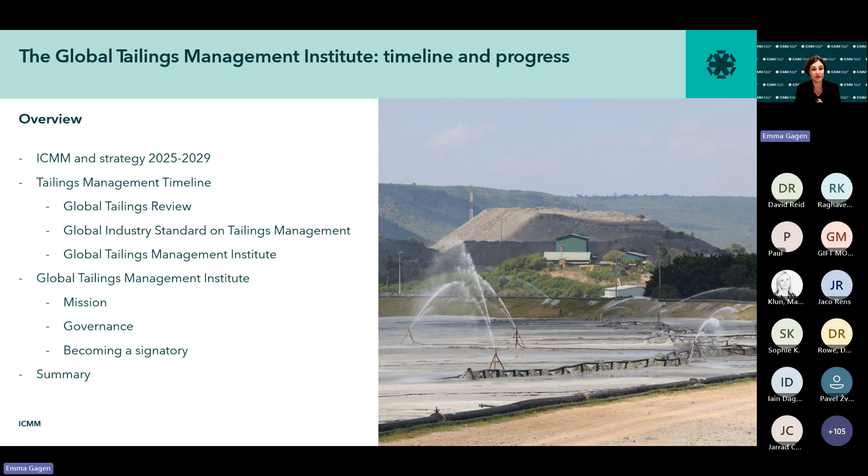So who's ICMM? We're a global sustainability leadership organisation bringing together about a third of the mining and metals sector. So our 24 mining company members are listed on the slide here. And then we also have about 45 or 50 association members, which might be commodity associations like copper, lithium, manganese.

Or they could be regional associations like the National Mining Association, Mining Institute, or MAC, for example. All of them share our vision for a safe, just and sustainable world underpinned by responsibly produced minerals and metals. Through our reach with company members, our standards are effected in more than 650 assets in more than 50 countries globally.

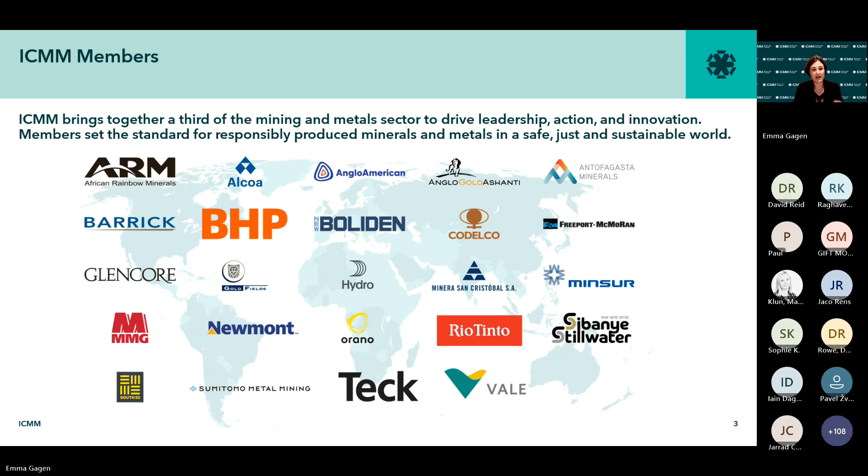Our mining principles are the foundation of ICMM membership. So it's not really possible for someone to just say, I'd like to be an ICMM member, can I pay a fee? There's a rigorous process around adhering to the mining principles we've outlined, and site level assurance and validation over a continual cycle against all of those commitments.

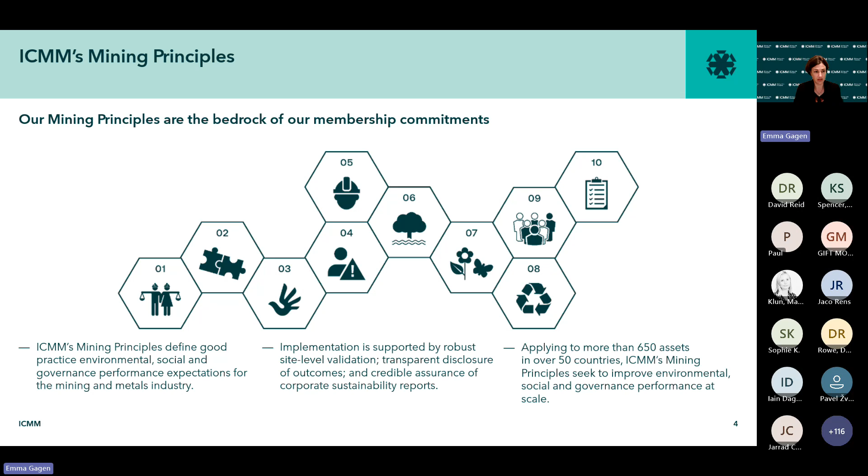There's 10 mining principles, and each of the sub-commitments under them are articulated on our website, or sometimes in more detail via position statements where there's a clear subtopic that needs a deeper dive. You can find out more about any of those on the website, everything from environmental performance through to social performance and governance. The tailings related principles are under mining principle number 6, which I'll dig into now. And it's actually our environmental performance portfolio.

It includes commitments on climate, water, pollution, etc. But our commitments around designing, constructing, monitoring and decommissioning tailings facilities in line with good governance and international good practice are the foundation. You can see we have a couple of footnotes against the commitment there.

And that includes taking a strong position that freshwater lake riverine disposal and shallow marine disposal is an absolute last resort. And the second footnote is around our commitment to implementing the global industry standard on tailings management. But otherwise it's kind of encapsulated in that very high level principle there.

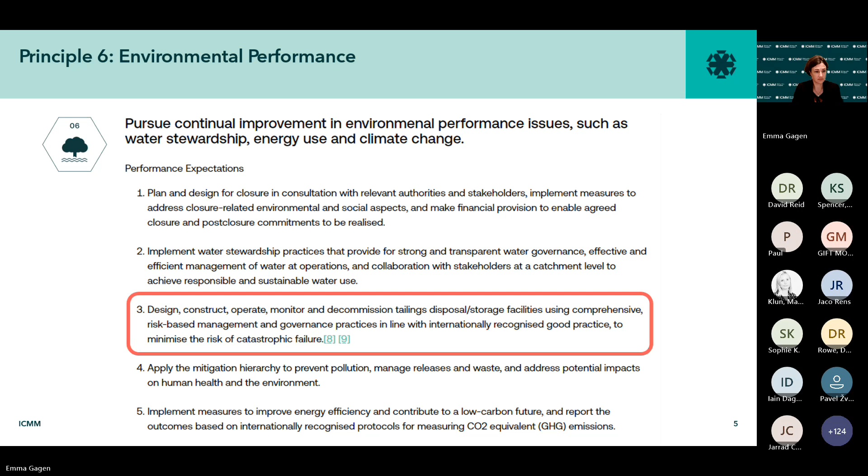Where we exist as an organisation is to support our members deliver on those commitments. This is what it looks like on a page for us for the next 5 years. This is our strategy that just started in 2025 on how we're going to support our members deliver on their commitments on safety, climate or tailings, as you can see under the performance pillar of our work.

We also have other parts of our work program that are around raising wider industry standards, so not the membership specifically, but outreach to other parts of the world or unreached areas of the sector, for example. That's primarily being achieved through the Consolidated Mining Standard Initiative. Happy to take questions offline on any of that work if it's of interest.

There is a tailings chapter, and this will become the standard that replaces our mining principles in the future. Then there's a third piece of work that is around dialogue, engagement, communication and advocacy. And you can imagine tailings gets a feature in there as part of our outreach or showcasing member performance. But this is also policy engagement and the data work that I talked about that's new in this strategy. So it's not focused on tailings in particular, but tailings may get a feature in any of these pieces.

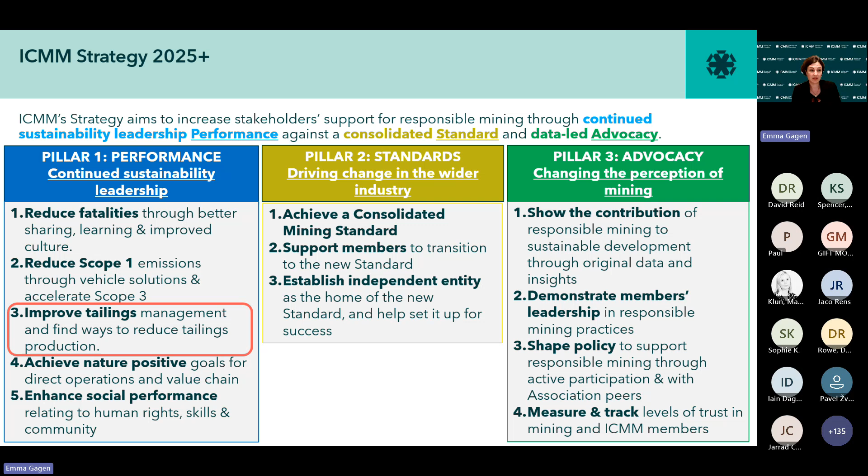So I hope that's a bit of a snapshot on where tailings fits for us as an organisation. It isn't something that we've started working on recently, however. So here's a kind of look back over the last 10 years, if you like.

In 2016, our council, which is the 24 CEOs of the major mining companies that are our members, agreed to a position statement taking a very specific commitment around tailings governance. And that includes everything from change management, the whole life cycle from pre-feasibility through to closure, and articulating really specific requirements on accountability, competency, planning, etc., emergency preparedness.

We had, in parallel, a piece of work or an idea being birthed that it wasn't only about safety, however, and a couple of years later Council also committed to a longer-term goal to do something really innovative and think about eliminating conventional tailings storage facilities completely. This is articulated in what we call our tailings aspirational goal. It's a much longer term kind of vision, if you like, a 10 to 15 year goal to innovate and think of ways to eliminate conventional tailings storage facilities.

This is, I think, a really exciting piece of work that probably hasn't gained as much attention as it might have in a different set of previous 5 years, if you can think about that.

A really important piece of work about collaboration to reduce the hurdles and the activation energy for overcoming some of the challenges around implementing new technologies at scale, or rolling things out and piloting and testing things that we can do with the membership that you probably couldn't do if you were just one company alone.

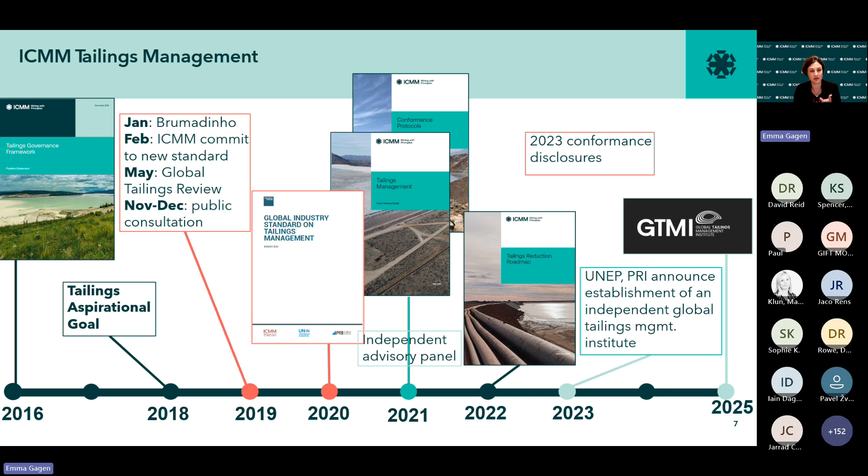In my portfolio at ICMM, under the tailings management work, this also included seeing the GTMI fully functional, if you like. While it's been co-founded and established in South Africa, there's a lot of administration and logistical detail that probably no one's aware of until they try to start establishing an independent institute.

So progress has been slow, or slower than I anticipated, and I had really hoped we would have had a public announcement this week before this presentation so I could share a bit more info with you. But I'll give you a sneak peek and say, keep your eyes peeled before Friday—I think you'll see a pretty key announcement coming out from the GTMI.

What you will have seen already is that it's an independent multi-stakeholder governed organisation. It has its own CEO, or will have its own CEO, it'll have an independent board, and it's incorporated in South Africa. It was really important to all the founding partners that the Institute, wherever it ended up, had strong tailings background and a presence in the Global South. South Africa seemed like a reasonable choice for that when we were considering where to have this long term.

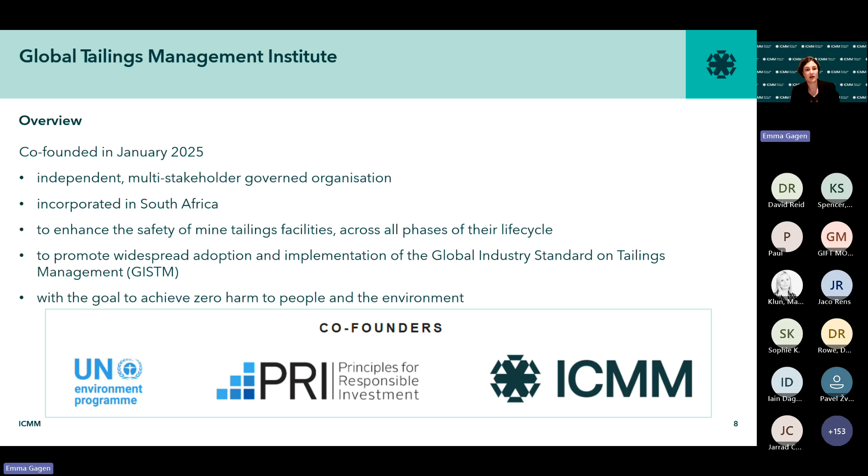Its goal is the same as the goal of the standard—the same thing we all want: to achieve zero harm to people and the environment from tailings facilities, doing that through implementation, adoption and certification against the GISTM. Their core function, delivering on that vision, is to manage the assurance framework around the GISTM.

So one doesn't exist yet. We had published our conformance protocols a couple of years earlier, but an independent assurance framework with accredited and certified auditors doesn't yet exist—it will exist with the GTMI. So that's their core function: to develop and then manage that assurance framework.

On the side, they'll also have a key role in supporting wide uptake of the GISTM outside the ICMM membership, widely across the industry, to facilitate knowledge sharing, best practices, capacity building, as well as disclosure of auditing outcomes. This was one of the key recommendations from the Global Tailings Review, that for this institute to have credibility, it needed transparency for stakeholders to see disclosure outcomes against the GISTM. That's going to be a really unique, powerful feature of the GTMI.

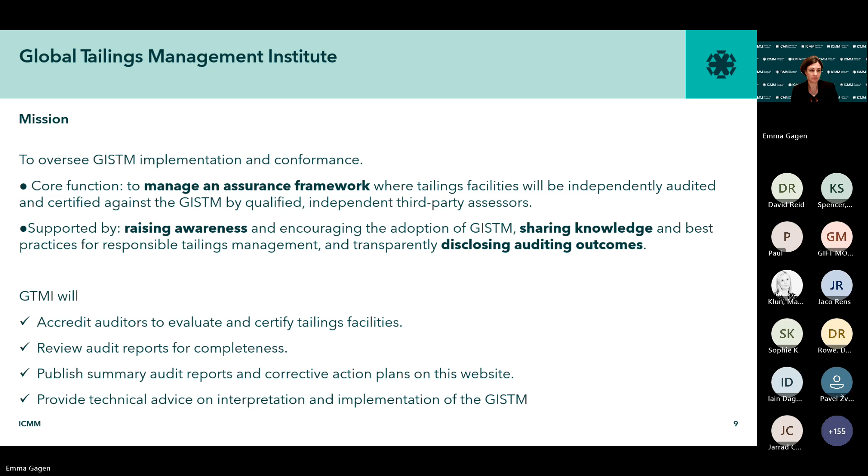It's a not-for-profit organisation. People can become a signatory by paying a fee, which should be a flat fee based on the size of the company, size being determined by number of TSFs—so less than 10 TSFs you might be a small company, more than 10 you might be a big company—flat fee based on that.

But the idea is not for it to become a money-making organisation, but for the funds to go back into the assurance accreditation scheme and the industry outreach and knowledge sharing for the facility.

The multi-stakeholder board that we've written into the Memorandum of Incorporation has 9 members, representatives from the mining industry, affected communities, Indigenous peoples, and others you can see on the screen. This is part of the reason why an initiative like this takes such a long time to get off the ground—you can imagine how difficult it is to bring different voices and perspectives from all these groups and have a constructive and productive board that's going to set the long-term future for the Institute going forward.

We've really taken our time since the call for applications from the board to interview and interview again and ensure we've got the right mix of people on the board. That process is very much in train, and I anticipate an announcement about the board later this week.

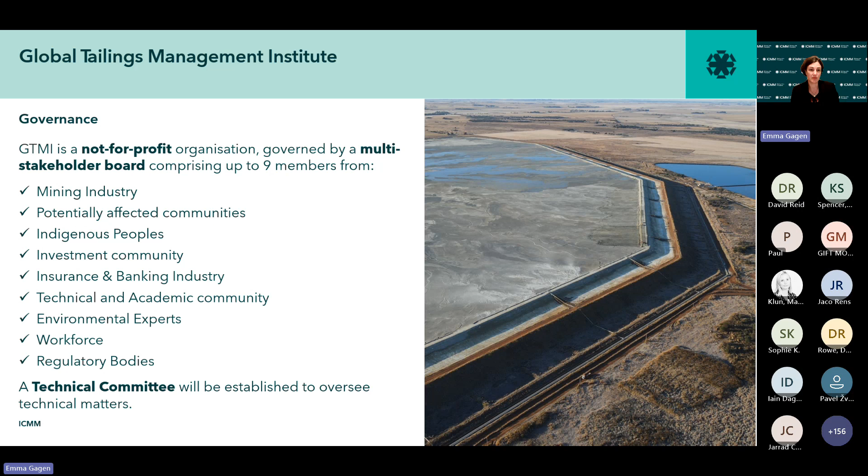Later, after the board is established and a CEO is recruited and in place, a technical committee will be established, and their role is to oversee any technical related elements that come to the GTMI. Whether it's questions about the standard or reviews of the standard, the technical committee will be individuals more tailings-focused than necessarily some of the representatives on the board, who all have an interest in tailings and are well connected, but aren't necessarily engineers. So the board and the committee will function in parallel with quite different scope.

As mentioned, you should see a board announcement soon. We're also in progress searching for the first CEO for the GTMI. He or she may choose to appoint a CTO - there's capacity for that in the governance structure. If they want to do that, there could be a CTO soon after, and the technical committee establishment will be very imminent, I believe one of the first activities after the board is established. So keep an eye out for those things.

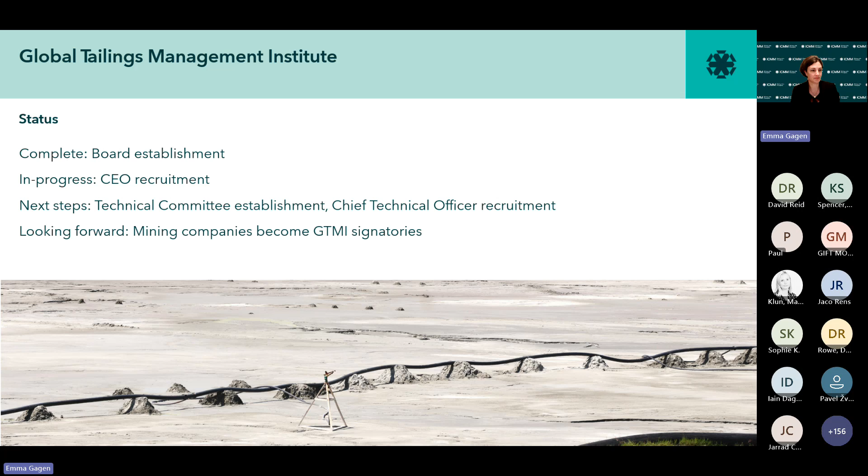Signatories are anyone who has responsibility for a tailings facility and can become a signatory of the GTMI - that's a commitment to responsible tailings management, to conformance with the GISTM, as well as knowledge sharing and capacity building more generally. If you want to become a signatory, it's a commitment to implementing the GISTM and fully disclosing transparently outcomes from the conformance against that.

It's also about stakeholder engagement, being able to communicate that you are a GTMI signatory, therefore you should be expected to be operating at a different level to others who are not. The founders anticipate this should improve relationships or give more social license to operate, improve relationships with regulators, potentially investor confidence, insurance coverage, etc. That's the business case articulation, if you like.

It's not just that GISTM is the right thing to do. There should become a distinguisher in the future where someone can say, I'm a GTMI signatory, my outcomes are transparently disclosed on the website, therefore you can trust what I'm doing and have confidence in me if you want to invest or approve a permit, or if you're a community nearby. That's the origin and the idea.

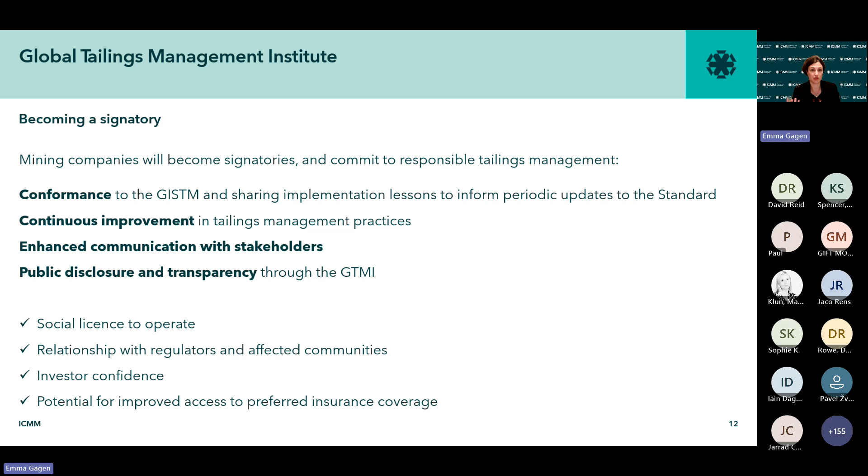If you're not responsible for or don't have operational responsibility for a tailings facility, you're still able to support the GTMI. Supporters have a role, for example, in fostering knowledge. They might want to host a roundtable or facilitate wider industry uptake, or create the connections necessary for the regulator to dialogue with the GTMI.

We don't have a limit on this, but it's just to signal that GTMI support doesn't only involve the financial commitment and contribution and the commitment to the standard - it can be from the rest of the community around tailings as well. So I'd encourage you, if you're a consultant or an interested party, to think of ways you might be able to support the GTMI and its mission through capacity building, knowledge sharing, and relationship support.

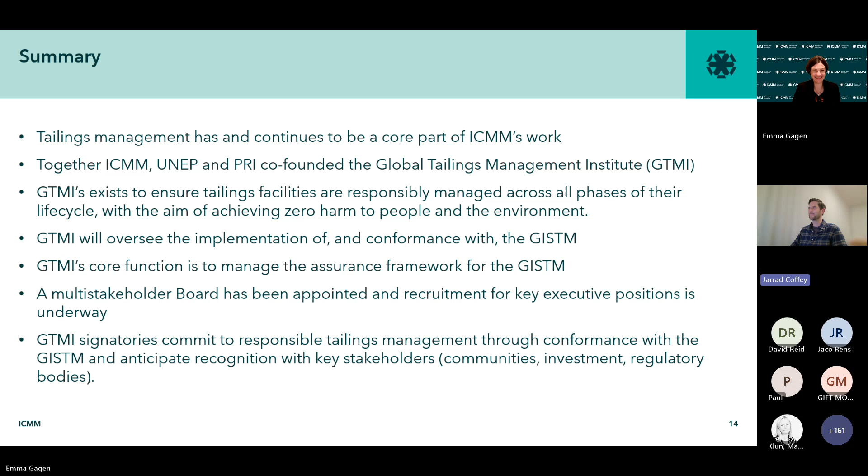Yeah, thanks Emma, really appreciate you taking the time to update us today. And we only missed it by that much, hey? Maybe next time there'll be a little bit more to share, I guess. I'll give everyone a couple of minutes maybe to think about some more questions in the chat.

Emma, one thing you didn't touch on was potential updates to the standard in future and how that would fit with the GTMI's responsibilities. Yeah, great question. And I purposely didn't, because I hoped someone might ask.

I believe the Memorandum of Incorporation will become public once the board is fully functional. It should be up on our website, so you'll be able to see any of this information to fact check me then. But the founding partners want the GTMI to be fully independent and fully functional on its own. So when the board is in place and the CEO, we're kind of extricating ourselves and taking a back step.

However, when there are ever decisions in the future from the board, or recommendations from the technical committee, whoever, to revisit or reopen or look at changes to the standard, the founding partners get called back in. So that's kind of the only time we would intervene again in this independent functioning entity in the future, and that would be if and when the standard is being reevaluated.

I would say that I don't believe a core or primary first step of the board or the technical committee is to open the standard. There's a lot they need to do around conformance, the assurance procedures, and then validation and how they're going to transparently disclose auditing outcomes. So I personally don't believe that reopening the standard is a first priority in terms of the priorities for the GTMI going forward. But we'll see once it's independently functioning what comes out.

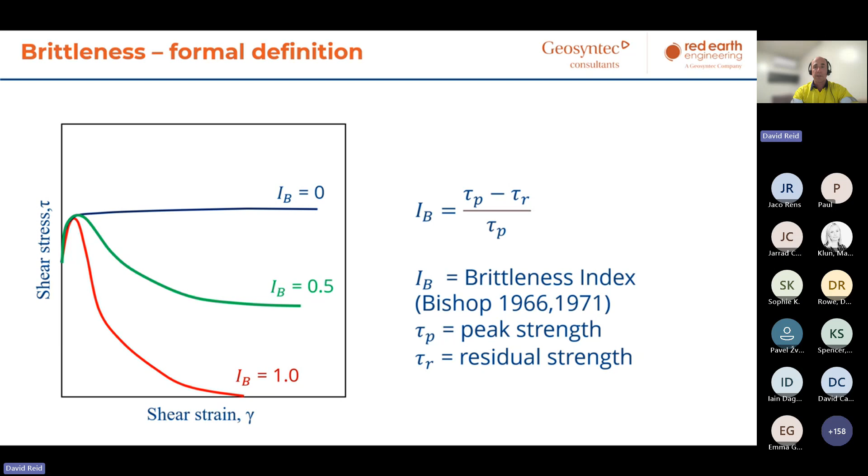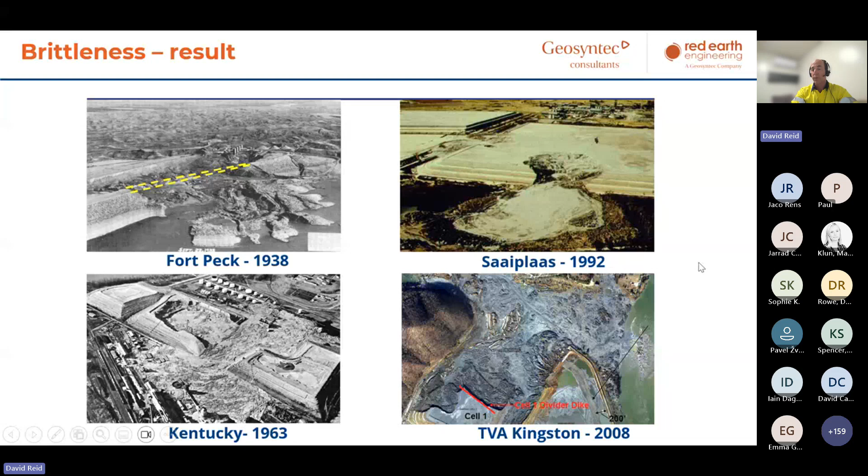Now, the problem with brittleness is that when things are brittle, they can look like this. They can fail rather suddenly in some cases, and they can go a great distance, because the more strength something loses, the further it needs to travel to reestablish an equilibrium, if it even can. So this is what we're talking about: things that go a long distance, can cause a great deal of damage, and in many cases can do this with very little warning, particularly if that drop post-peak is steep and fast. In that case, the ability to have warning for this is very little. One of the reasons why we're so worried about this type of structure, brittle soils.

Now, this brittleness index has been incorporated - probably the place you're seeing it most often now is in the most recent ICOLD bulletin, which is really good because it sets the scene around this concept. It goes through a bunch of background about it, it's a very good read. So it's really useful because it's got us talking about the right thing.

I'd kind of argue that people spend a bit too much time worrying about whether something's liquefiable or not liquefiable, running an Atterberg limit check, stuff like that. That's almost a red herring. What really matters is how much strength does it lose post-peak and how fast, because the Atterberg limits, while giving you some indication of that, are not really the key. Whether something's liquefiable or not is not the key question. The key question is how brittle is it and how fast is that going to happen?

Okay, so the ICOLD bulletin breaks this up into some different categories. That's not really the main point of today, you can read that - it explains it better than I can.

The main thing I want to talk about today is that if you want to use this framework, which of course we all should be using and will be using, you need to be very good at measuring both the peak and that final residual value. Because if you can't capture how the soil is going to behave in situ in some reasonable way, then applying this kind of framework becomes more difficult, and in some cases could be misleading and dangerous if one is estimating these things in a not-state-of-practice way and getting erroneous values.

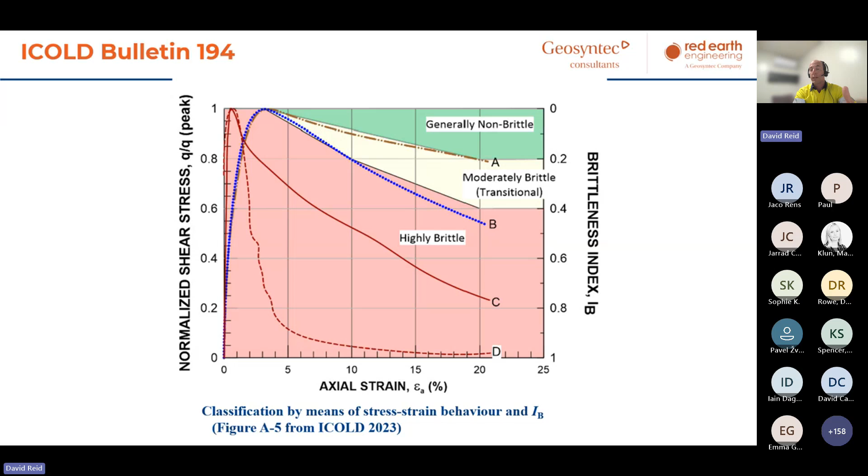So that's the point of today, is just to go over some areas where I see issues happen around how you would capture the strengths you need and the stress strain results to make this kind of a conclusion. I just want to start at the beginning. This first one's going to be lab based, because that's kind of my home turf.

I want to start really basic with moist tamping, because even though a lot of people quite rightly don't like moist tamping, it's sometimes all we have for some of the situations we find ourselves in. We want to prepare tailings, say silt, very loose. Now, to do that, we don't really have any choices in terms of preparation technique other than forms of moist tamping right now. So we end up using moist tamping probably more than we deep down really want to be using it.

That's what you're going to see across the board in a lot of cases for good reason. Now, the thing about moist tamping is there seems to be a misconception that just a standard off-the-shelf procedure that everyone's using is going to produce something that's as brittle as in situ. I want to be really cautious about that because, as terrifying as it might sound, we're not sure that we can produce samples as loose in the lab as might exist in the field, which I know sounds kind of ridiculous, but the evidence points that way.

So let's just take a little journey through this particular sample. I'm preparing a silt tailings here, nice and loose. That's the red dot. I'm going to confine it under about 20 kPa just so it doesn't collapse, and then make it as loose as I can. So about void ratio of 1.05-ish for this particular sample. That's as loose as I can probably make it, okay? Working really hard to make it loose.

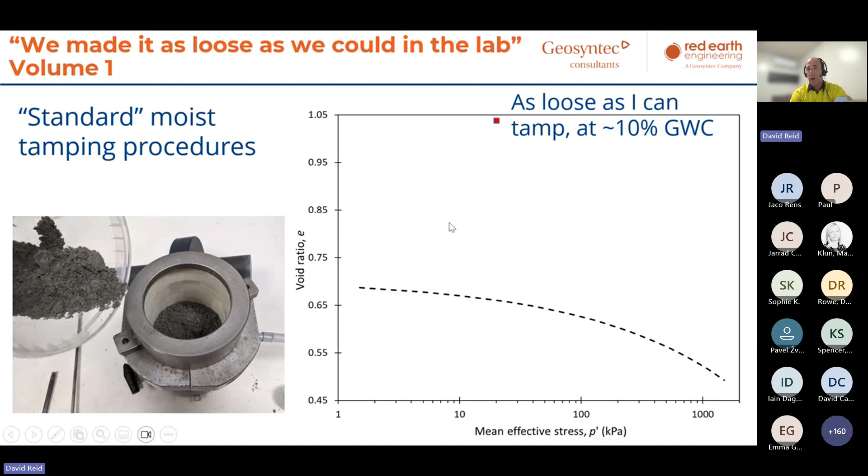Now, when you prepare these samples, you then saturate them, because unless you're doing something really cute and academic, usually you want a saturated sample. So then they collapse. They collapse a great deal. And that's okay, that's fine. That's just the loosest we can probably make it from this particular journey, now in a saturated state. We generally want to be saturated because that's the condition we typically want to test in.

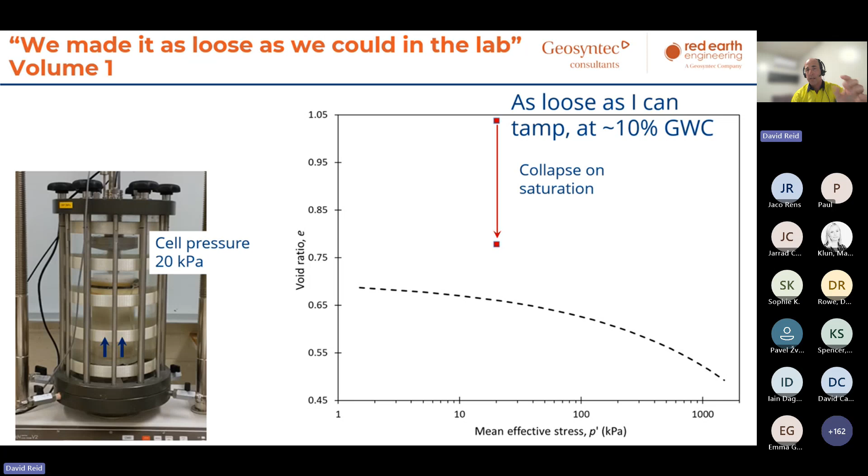Now, it's this collapse that is actually what makes these kind of loose tests and obtaining the critical state line so challenging, and why we use things like end of test freezing. But that's kind of a different story. Let's just assume the void ratios are right here for the purpose of this presentation.

You then might consolidate that sample to a particular mean effective stress, in this case 300 kPa for example. And then you might shear it from that particular state, which will tend to the critical state line. Now, this is a pretty common procedure people use across all the time now. You consolidate to a bunch of different stresses and then shear to the critical state line.

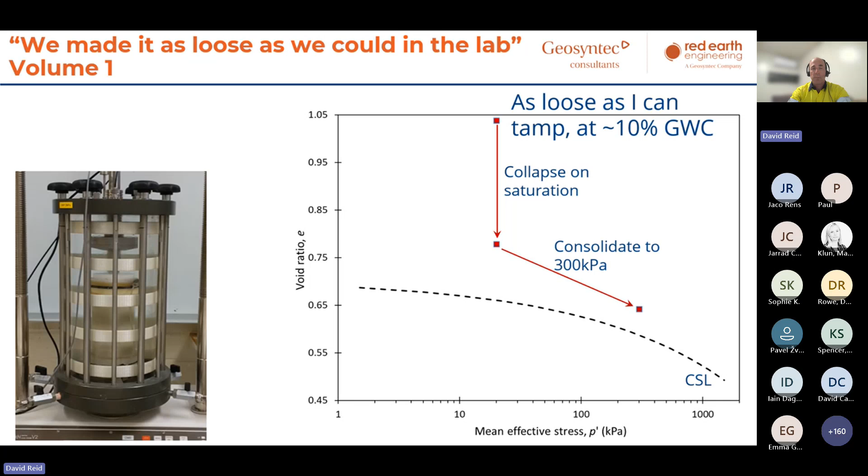Now, people have taken data like that and they've said, okay, how loose can I make it using moist tamping, which is the gray lines on the left. I'll turn my pointer on to make this easier to deal with. People will get a line like this using various types of moist tamped specimens, which is great, and they'll shear it and get a critical state line like this.

It's very common. And then they might look at these results and say, okay, the brittleness index, that thing we were talking about at the beginning, is reducing with mean effective stress. The reason for that, and this is very common, there's two reasons. A, the critical state line is curved, so the distance these tests need to move horizontally to get to the critical state line gets to be less and less, which makes something less brittle. It's losing less mean effective stress during shearing.

And secondly, this line starts to converge on the critical state line. Typically, here I can get a much looser state than here, even above and beyond the curvature issue. So people have looked at this and said, quite reasonably, that at higher stresses it looks like brittleness generally reduces, which is certainly a reasonable conclusion from this particular outcome set of tests.

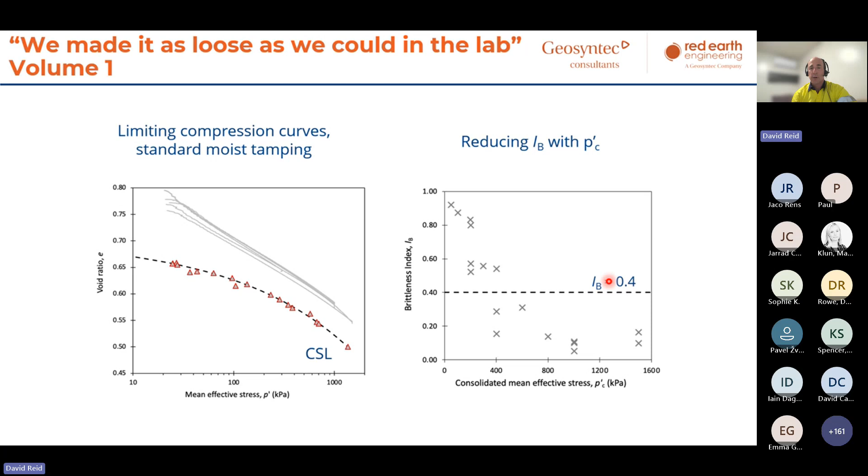One thing to be cautious about is we use moist tamping in the way that everyone uses it. We prepared a sample and saturated it at about 20 kPa confining pressure. Okay, that's reasonable. Everyone does it that way, right?

Well, say you're doing a filter stack. Let's say your TSF is a filter stack. You deposit it. Some of it's not compacted in some areas, and it's not saturated initially because you've done a decent job of filtering the tailings. That's this red element right here. Not saturated. But in a filter stack you might then put 50 meters of tailings on top of that before it subsequently saturates, owing to either a rising phreatic surface or combined with the decreasing void ratio and therefore increase of saturation ratio.

So two things are going to happen there that could make it saturated. What's quite different here is this is now happening under, pick a number, 500 kPa, for example. A quite different situation to the moist tamping procedure, which we almost always use, and which has actually no real field scale logic to it. It's just something we've always done.

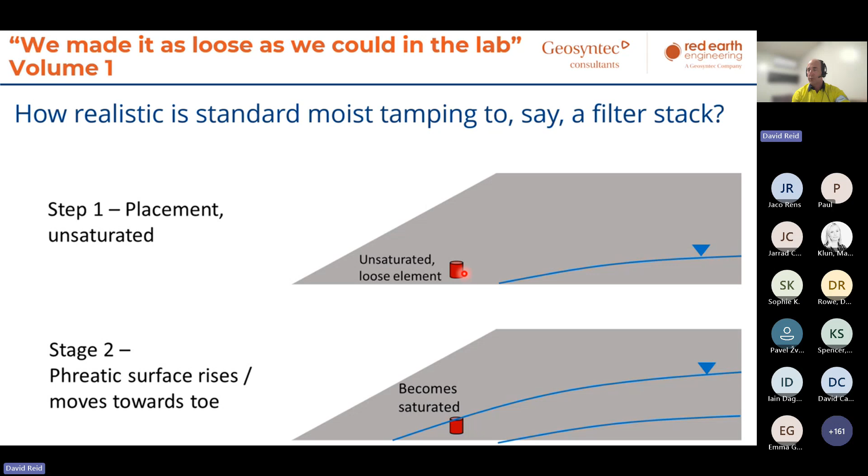So what happens if we were to do our testing like this? This same red is tracing that test I showed you previously, where we did the saturation procedure at 20 kPa, and we ended up here. Blue is where we apply a cell pressure of 300 kPa as an analogy to maybe a lot of overburden pressure before the saturation process, and then we saturate it. In that case, we end up at a void ratio of 0.72.

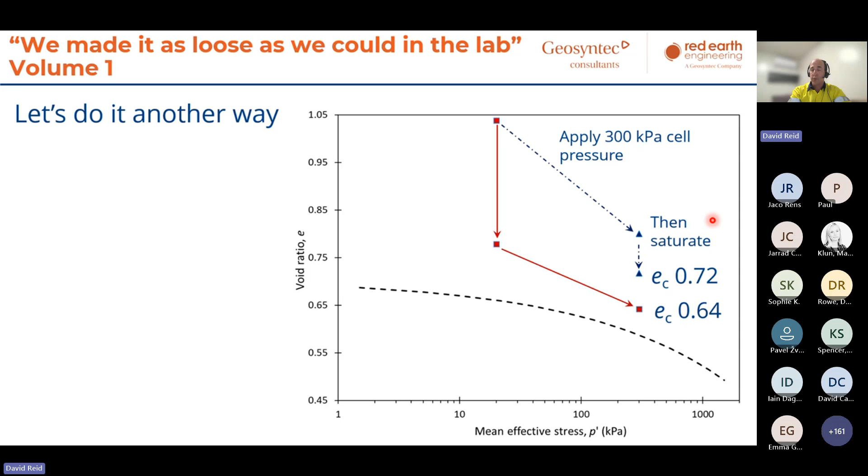Now, 0.08 might not seem like that much difference, given a few things, but that is a very big difference in terms of the brittleness you might infer for a particular sample. If you shear those two particular tests and compare them, these are the responses. Now, actually, the brittleness index isn't the thing that changes probably the most dramatically here. It's more the post residual strength and the peak strengths are both dropping, but the brittleness index is changing as well.

So this seems like a very nuanced lab thing that's almost irrelevant, but red is what people are going to produce 99 times out of 100 if you just send some tailings to a lab and say, can you do the testing for me, how brittle is it? Red is what the brittleness index check is going to give you. But there might be situations where blue is a much more representative scenario for in situ. So just keep an eye on that.

Is what I'm making in the lab an analogy to what's happening in the field? Is it reasonable? Is it the same state, the same history? Those kinds of things are important if we want to use this framework.

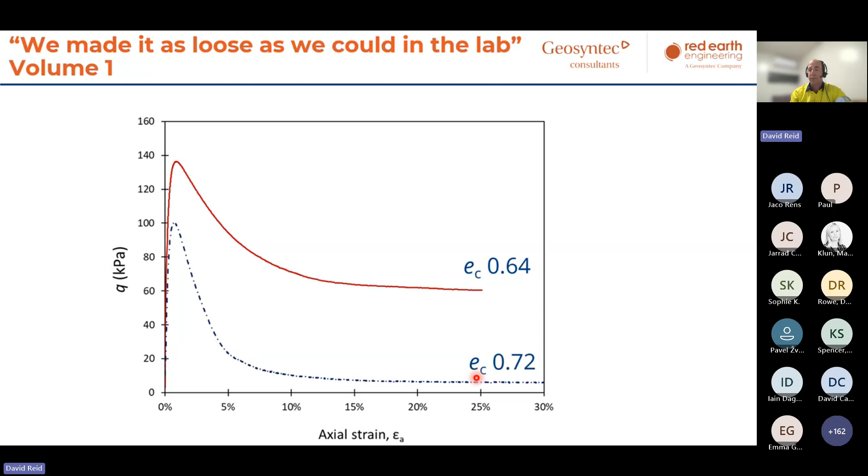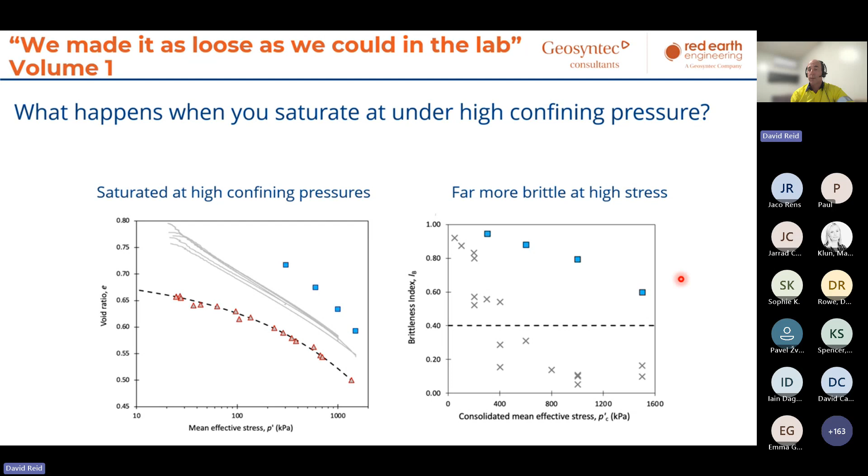So be careful with conclusions that things become less brittle at higher effective stress, if that might not be the same history as what you're seeing in the field.

Now, a second thing, similar topic but perhaps even more scary, is subaqueously deposited silt tailings. If you look at my publication history and some of the stuff I post on LinkedIn, I'm obsessed with this particular topic for a reason that I think is good. While this photograph shows a decant pond, which you may say isn't relevant for stability because it's a kilometer from the perimeter, what you often find in TSFs is that the part controlling stability was probably deposited like this in 1985 or 1990, very close to the starter embankment.

Early in a TSF's life, it's much harder to control the pond and have those beautiful thin lifts, and there are topography issues. It was maybe a different era in some places, in some times, in 1985 or pick a year.

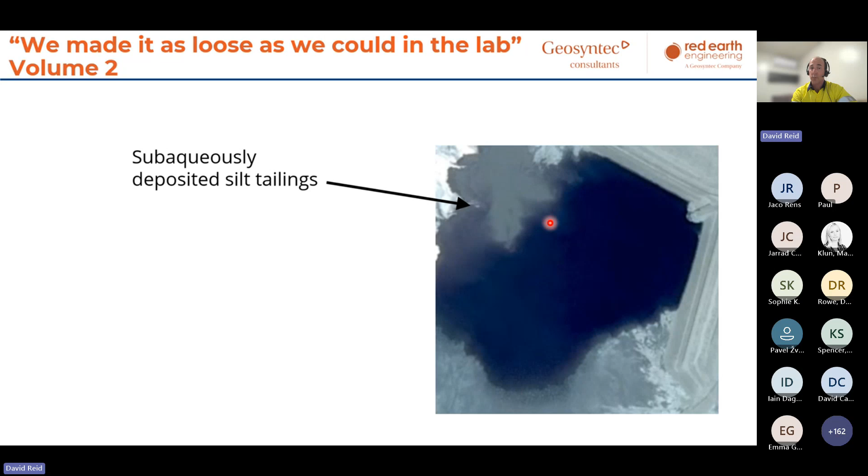So this kind of deposition can generally make the loosest possible condition that we know how to prepare, and it's often looser than we can prepare in the laboratory, which we need to be really cognizant of.

This is an example where we've tested material from a place that was deposited like this. We measured the critical state line on the sample that was recovered, and then compared that to the void ratio of the samples brought up in tubes. Now, we're not testing this in an undisturbed manner.

That's not going to work for this, and we'll talk about that later. Testing tailings that you can't obtain undisturbed samples of, but pretending that you can, is probably the single biggest issue with trying to use brittleness index. If you do that, your samples will be heavily disturbed, probably dilative if anything, and you'll come to very erroneous conclusions about brittleness. So that's almost a separate issue.

I've recently ran a poll on this particular topic because I'm so interested by it. The vast majority of engineers who seem to have had lived experience in this space agree that this is possible, or at the very least that they're not sure it's possible, but they certainly wouldn't dismiss it if they're the engineer of record responsible for this particular TSF.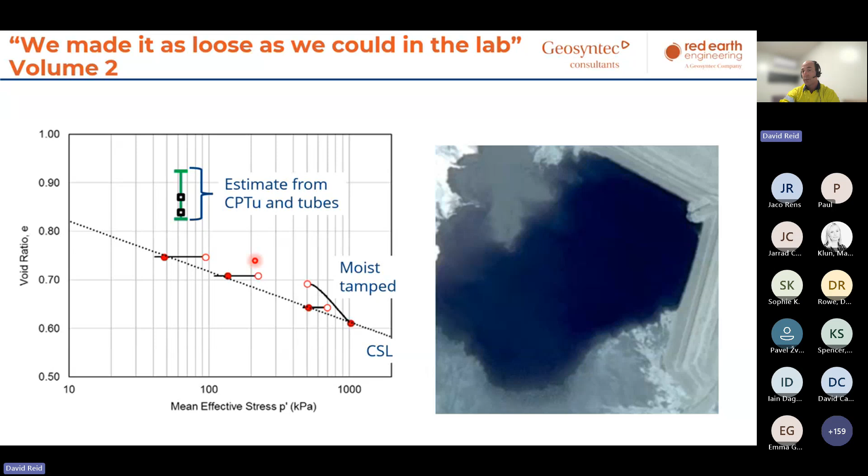There seems to be evidence that places that are subaqueously deposited are often the culprits for triggering. TVA Kingston, which is not a TSF but very similar - the area that seems to be where the initial failure happened was an area that was subaqueously deposited through water in the early stages of the facility, okay? The siltiest particles deposited in a subaqueous manner in a relatively still fashion - that seems to be where the trigger occurred.

Feijão - if you look at photos of this TSF historically, you see things that you don't want to see on any upstream raised TSF. But again, there's a suggestion when you look at the CPT results and how the panels have examined this tailings that it's very loose, and everyone seems to feel that it did exist in very loose states, looser than could be created in the lab.

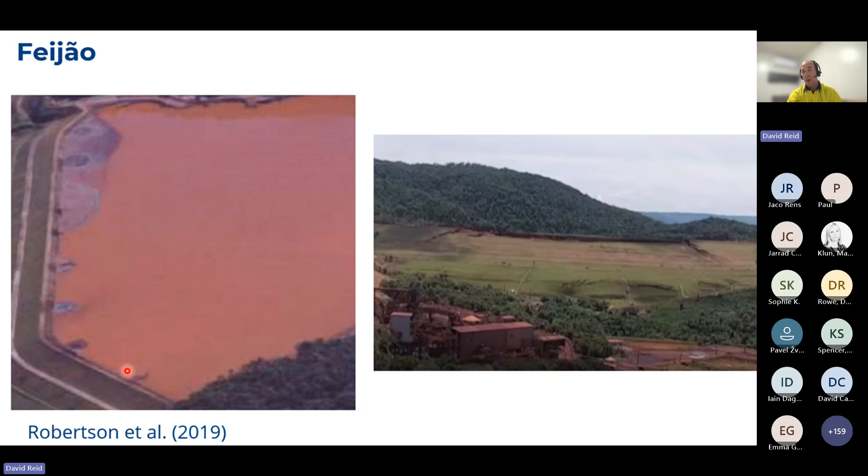For example, in the first of the two panels, Robertson et al. are indicating that about half of the fine tailings in situ are looser than any of the samples they can prepare in the laboratory. They're just using that as a matter-of-fact outcome, because I don't think it's that controversial either, that subaqueously deposited tailings like this could definitely end up looser than you can make in the laboratory. So I see lots of people incorporating this into their work without any controversy. I don't think it's hard to argue against it as a phenomenon.

Tamping procedure - one more thing in the lab. If you prepare samples in the lab, you might prepare them loose. Typically that's what I would recommend doing - as loose as you can, very light tamping, and then consolidate them to a particular state and then shear them.

You might end up in situations though where you want to maybe make it a little bit denser, or play a couple games like that. So you can actually tamp it to here - you could take a hammer or a static load cell and tap it to here, for example. That may or may not work at making it a little bit denser.

Depends on what stress you're going to consolidate to, among other things. But it's also possible, if you play some games to get a result you want, to have samples end up at the same state parameter. Let's say you want to write a paper on the topic and want to see what effect this particular type of compaction has compared to a very loose moist tamping.

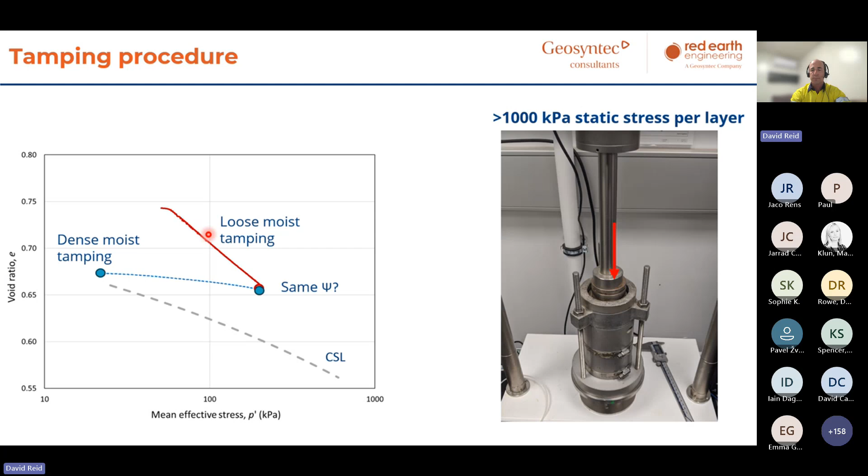Well, the blue sample and another sample both have the exact same state parameter, within the accuracy we can measure. And this isn't just a single test, we've done this a bunch of times. Blue is the response for the sample that was tamped dense, and red is the response for the sample that was tamped very loose. So both seem to be going to the same critical state line.

I'm cutting this off at 15% strain for clarity, just for showing. There's no evidence they're not going to the same CSL. Therefore, they would have the same residual strength ratio. But the peak strength for the densely tamped sample is far higher, which makes complete sense. It's got an over-consolidation ratio, in essence, based on either a hammer or a static load cell, depending on however you made it dense. So just be cautious.

I see this happen all the time. There's no real reason to do this. Moist tamping is already probably far enough away from the fabric of subaqueously deposited tailings anyway, or hydraulically placed tailings. So don't go make it even further away with a hammer.

Would be my main recommendation. If you want to get a little bit denser, like let's say you actually wanted to get a state like where my red pointer is, there's a lot of other ways to get that other than using a hammer. You can tamp it a bit wetter, you can vibrate it, use small cyclic loading. There's a lot of things you can do to get there without a hammer. So just consider those.

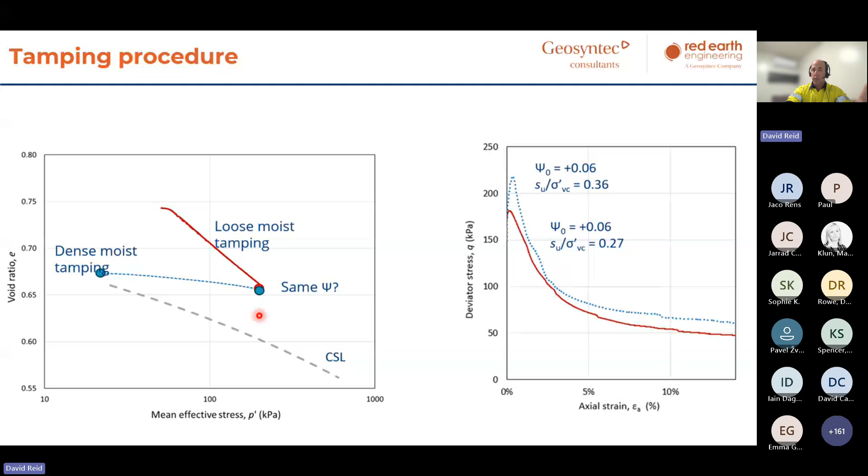Ignoring the quasi-steady state - this is something I'll go through very briefly because it gets a bit heavy into soil mechanics, but I think it's something that I see happen quite a bit. And that is ignoring the quasi-steady state.

If you look at the liquefaction case history database that Jefferies and Been collate in the state parameter framework, you'll see that some of those case histories have a state parameter of 0, plus or minus 0.02. Now, if you think of things tending towards the critical state line in a monotonic manner, just whiteboard critical state soil mechanics where everything goes to the CSL directly, something liquefying with a state of negative 0.02 makes zero sense, because how would that liquefy if it's going to go to the critical state line and dilate?

What you see is when you shear samples of some materials from near or on the critical state line, in that kind of neighborhood, they exhibit what we call the quasi-steady state. They contract initially, sometimes a significant amount, then they start to dilate back to the CSL. So no one's suggesting that critical state soil mechanics isn't valid with this kind of test presentation, just that the small to medium strain behavior might not be what you expect from what I'd call whiteboard critical state soil mechanics, where you draw a bunch of arrows and they're all going to the CSL.

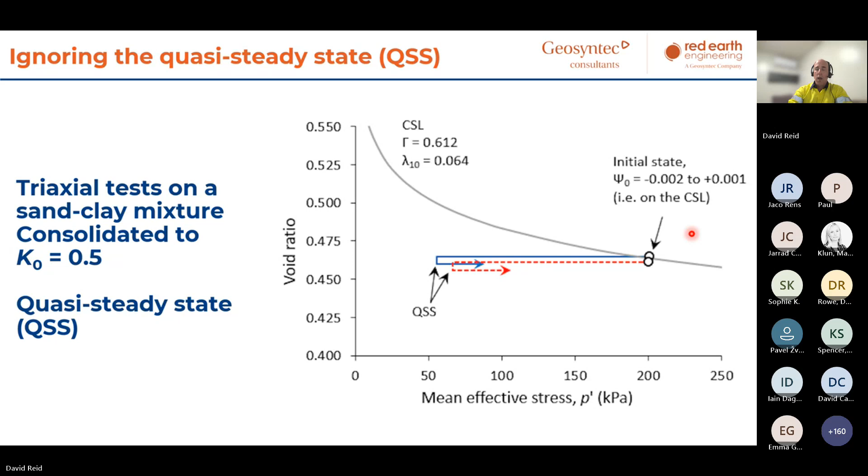Now, why does this matter? Why is this not just an academic detail? Well, when you look at the test results, say for example in all three axes, you see this particular material hits a peak strength at about 0.01 strain, very small strain, drops down to a quasi-steady state with a significant strength drop. So it's very brittle in that way, at 4 to 5% strain. And then it starts to dilate.

So again, no one's suggesting that this isn't going to eventually dilate to the critical state line at the end of the test or at the end of its projected life. Now, in a triaxial device, we've usually got 30% strain to work with, so we're not going to get there with this particular sample. But I'm not suggesting we can't go there someday. Again, why does this matter?

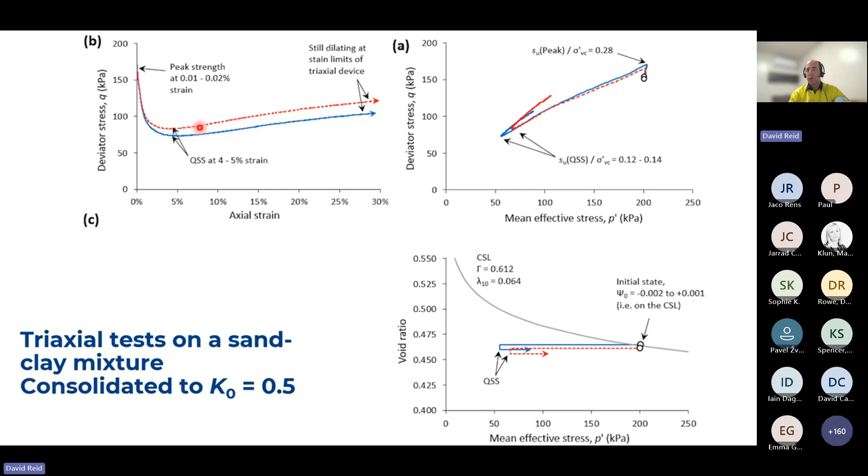Well, think about this brittle strength loss between 0.01 and 5% strain. Now that's happening in an element test that I can control easily - it's strain controlled, everything's easy and controlled, and the sample's not going to fall off the table or lose control. What about if that particular response is going to happen here in a slope, which is stress controlled?

Slopes in real life are stress controlled, not strain controlled. The reason we do lab tests strain controlled is that it's easier - machines like to work that way. We can do stress control tests, and they're very valuable to demonstrate, like in videos, what liquefaction might look like.

So they're very useful. But if this particular slope is loaded, and it causes that element to have this response - a peak at very small strain, dropping to a much lower strength, but then wanting to dilate in element test terms - if this soil has gone 10% strain before it even starts to slowly regain strength, what's happening to this slope? The slope is probably gone, or there's been such significant deformation that it's already lost freeboard, or bad things have happened.

The further point might be that this dilation we see in an element test might not be something we can count on in a field scale scenario, because the slope is moving, it has momentum, there's vibrations happening, and potentially small amounts of partial drainage that prevent dilation. So even if we could count on this, it wouldn't matter anyway.

So the concern I have is that I see brittleness calculated with this value, not with this value. I would strongly argue against that, and I would suggest that if you see quasi-steady state behavior, assume that is your minimum strength that you're calculating with and working with.

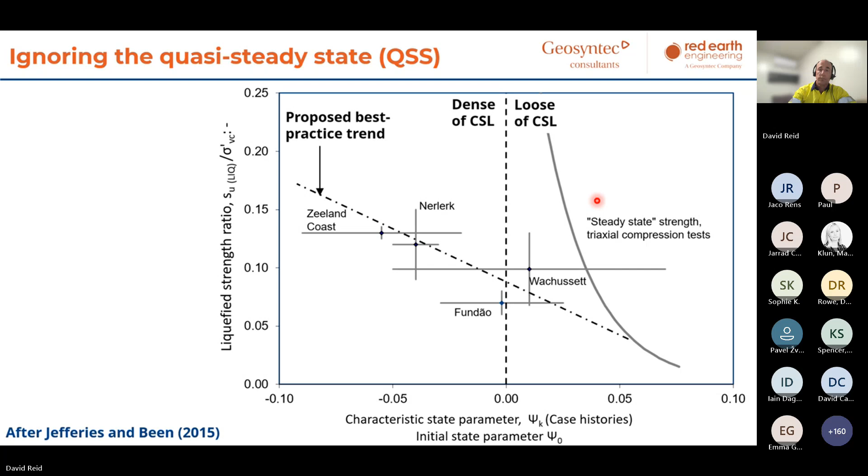Now, principal stress angle - I'll go quick. It's something for reading later, but it's ignored hugely in our profession, which is not good in my opinion. Principal stress angle, the direction of the largest stress, is vertical in a lot of the tests we do, like a triaxial test. That's a triaxial test here, a kilometer from the crest - vertical principal stress. There's other things like axisymmetry, but they're not the main point today.

This little element below the slope, which is actually far more relevant for whether the slope is going to fail or not, has a rotated principal stress angle. Sigma 1, the major principal stress, is on an angle. Now the problem is that materials deposited under a vertical gravity field...

Because when these tailings are deposited, they're not below a slope - they're on a flat beach, deposited in a vertical gravity field. The orientation between particles that develops under that vertical principal stress is best or most efficient at resisting loads in the vertical direction. If you then build a 30, 40, or 50 meter high TSF behind that location, you're rotating the principal stress angle, loading it in a direction that's not as efficient at resisting loads.

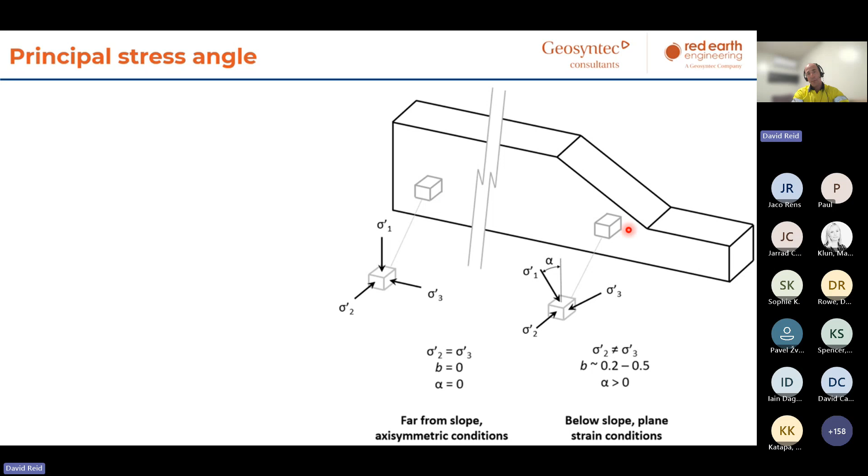So if you take only triaxial test results and map them there directly, that can be a problem. This is a bit of a cherry-picked example of a particular sand we tested at UWA in a hollow cylinder - almost identical. Negative 0.03 and negative 0.04 state parameters are within the rounding error you can achieve in a test. One has a principal stress angle of 0, like a triaxial test. One has a principal stress angle of 45 degrees, more representative of below at the bottom of a slope.

Now look at the difference. No one here is suggesting that these aren't tending to the same critical state line at large strain—they're both going to probably go the same spot. That's about beyond what we can probably measure in a hollow cylinder, for reasons that don't really matter here. But what does matter is, if you're accepting the previous slides about quasi-steady state importance, this red response indicates brittleness. This is a brittle sample—it's losing significant strength post-peak. This blue sample has a brittleness index of 0. It's dilative. You'd look at that blue sample and say, we're good to go. The red sample, maybe not so much.

So be very cautious in some cases of directly mapping your triaxial test to below-slope conditions, okay? That's a really loaded statement, there's a lot to that. There are times when it's perfectly fine to use triaxial tests in a process where you're measuring the critical state line, and then using it in the best-practice approach of Jefferies and Been, for example—that's an appropriate use of a triaxial compression test. However, directly mapping the triaxial compression stress test behavior to the bottom of a slope and applying it directly might not be, in many cases, an appropriate use of that triaxial test result.

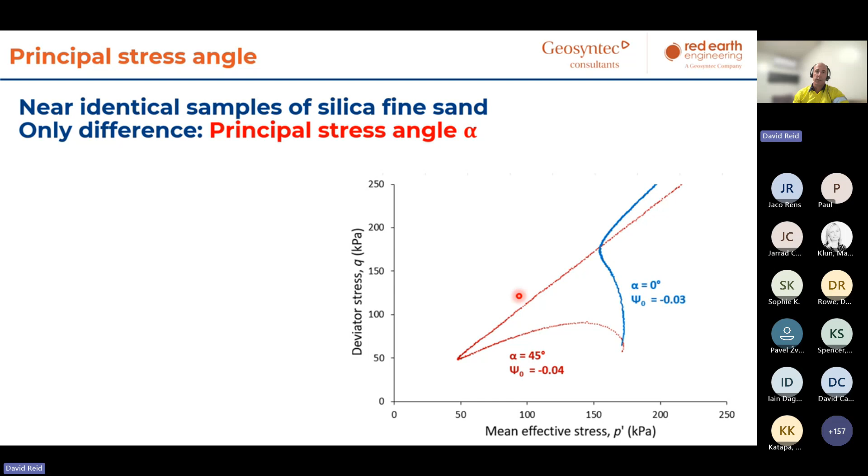Final one—I've got some other slides but I don't want to go crazy, it's probably getting too late. But the last one, because I see this happen all the time, and we only recently figured this out enough to get it accepted in a review journal, is direct simple shear tests, and how, if you don't do them right, they can really give an erroneous value of brittleness.

Well, if you go back through the history of the DSS and how the constant volume procedure within it is used, what you'll find is the strongest evidence for it is for dry sands, which have no matric suction of relevance, or saturated clays. People have done all these fancy experiments to prove the constant volume technique in the direct simple shear works and is applicable, and that's good evidence. But the problem is that evidence is very specific to the types of tests it was done to or developed with. We are often caring about things like silts that we want to prepare loose, and we might use moist tamping.

The conventional flushing procedures in a direct simple shear will not achieve 100% saturation in most cases—you might be at like 80%. 80% is the range where matric suction is playing a role in a silt. A lot of silts at 80% saturation will have significant suction, maybe suction hardening with it, which changes the critical state line. But don't get bogged down in that.

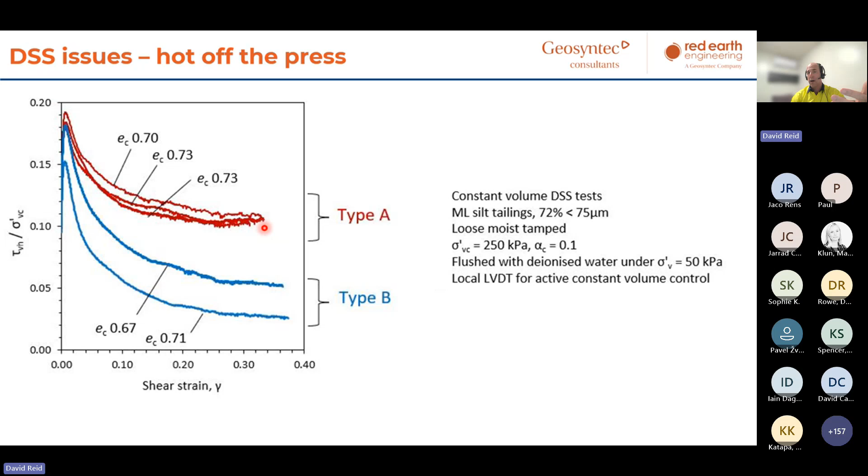The long story is, if we improve the saturation—so for the blue test, we flush the samples with CO2, which is not at all a conventional DSS procedure, and then we use back pressure. You can only get about 10 kPa back pressure in a conventional DSS, at least that we had—you maybe could do a bit more—and you get a far, far more brittle response. This has been a big issue in DSS for a while, because I've seen a lot of studies where the DSS isn't showing as brittle a response as a triaxial, which doesn't seem to make sense if all that stuff about principal stress angle I just said is true. Now there's a few reasons for that.

The DSS isn't measuring true shear stress. It's measuring horizontal shear stress, which has other nuances.

But that's a side issue compared to this main show, which is that testing samples that aren't fully saturated can give you a very erroneous indication of brittleness, even in the constant volume DSS device, which is kind of designed to not suffer from that or not have to worry about saturation. But actually, it turns out you do for a lot of the materials we care about.

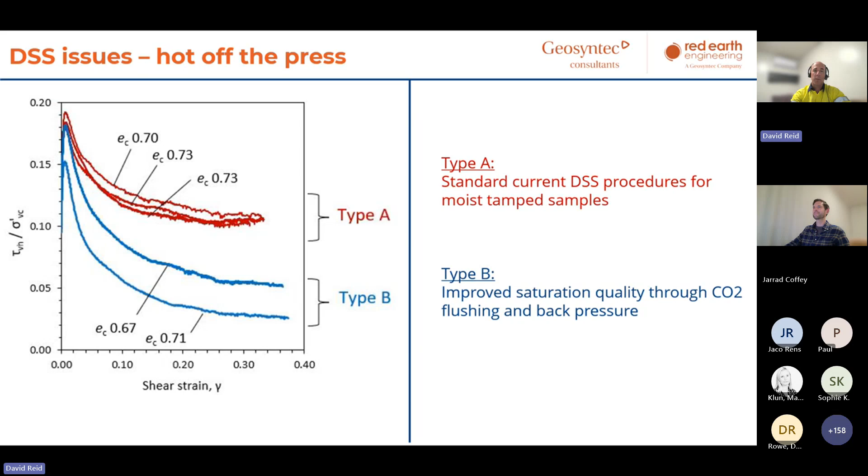Oh, sorry, this is just a state diagram of that particular plot. Now, what's interesting here is red is those samples that were saturated using conventional procedures. They don't seem to tend to the critical state line derived from triaxial tests. The blue ones, well, within the accuracy at which we can measure mean effective stress in a DSS, which isn't great, they're going much, much closer to the CSL. Because actually, whether the CSL is unique between Lode angle and principal stress angle is probably somewhat controversial.

I don't think the evidence arguing against it is that strong. And when I look at things like this and the work Ricardo's doing with the hollow cylinder, I don't think the evidence is that strong. I think there's a single critical state line, regardless of Lode angle or principal stress angle. But anyway, that's again, maybe a slightly academic detail.

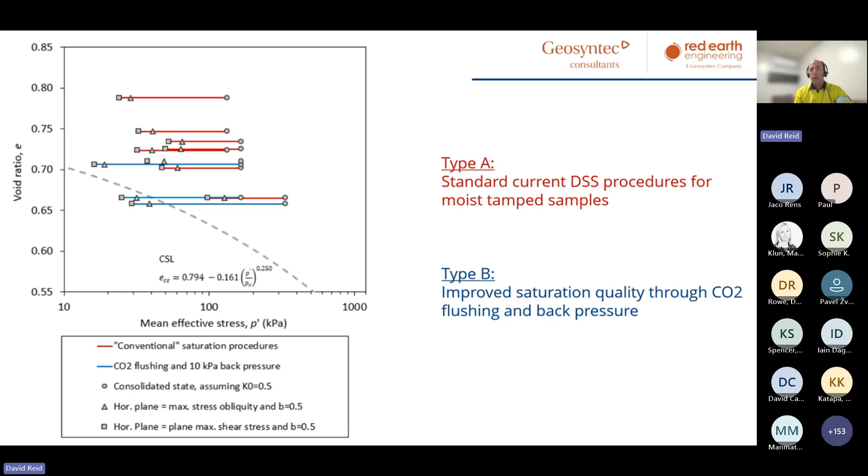The main point is that if you want to measure brittleness from a DSS, you want to make sure it's fully saturated, which is either going to involve CO2 flushing or potentially using a confined type simple shear that has a cell pressure. That has its own nuances that are important for the tester, but maybe not the key for right now. And if you were to plot, for example, state parameter for those tests against brittleness index, let me bring the pointer back.

Let's say you took a bunch, these tests in here are using conventional saturation procedures. These tests up here are using either a DSS with better saturation procedures or other things like a confined simple shear or a hollow cylinder. So yeah, we would expect a trend between brittleness index and state parameter, or a state pressure index as well, for sure. But the fact that these are way higher at a given state parameter is what's scary, okay?

Because you might be saying, oh, in situ, I think I've got about 0.1. I think my brittleness index then is maybe 0.3, which is going to be a very different conclusion to a brittleness index of 0.8. In fact, that's going to send you on a whole different journey in the ICOLD guideline of some of your factor of safety criteria, things like that. That's going to be different depending on how you prepare that sample.

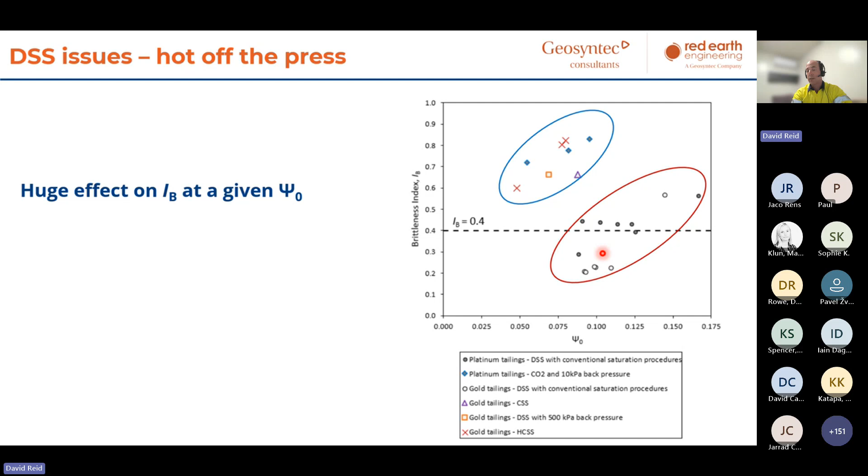So just be cautious with how you get that data from a DSS for brittleness assessments. Another one - now we're going to move. Maybe if you don't like tailings lab testing, you'll probably be glad that we're moving away from that. The vane shear test.

Let's switch to that. That's a nice in situ test. There's much less issue with sample disturbance because we're not carrying samples back to the lab and having them become dilative on us. But what you want to be careful of here is that most vane shear test standards were originally developed for clays, and even when they talk about drainage, they're worried about drainage for the peak strength measurement.

That's important because the longer you spend rotating a vane in the ground, the more likely there is that drainage is going to play a role. Now, if drainage becomes a factor, it's going to cause the strengths to be higher than they would be in reality.

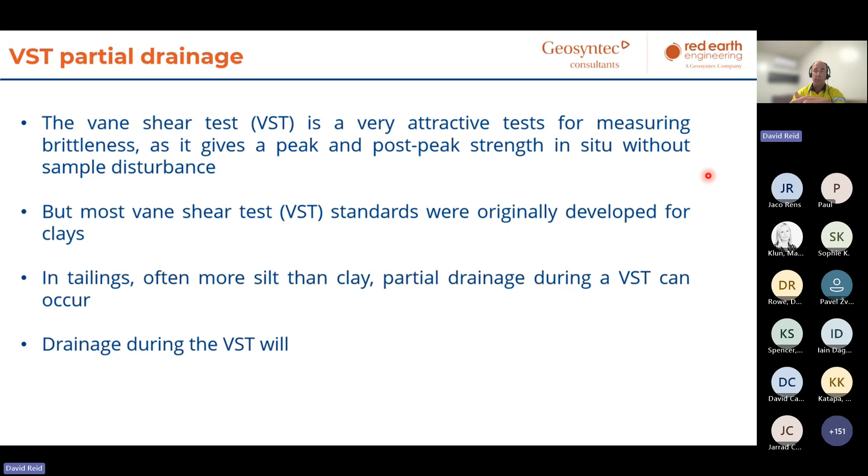Okay, this is an example. A number of people have shown this for peak strengths since probably the last 10 years, and people have recently published some ideas suggesting how we might update standards to deal with this. But actually, it's post-peak strength where I'm most worried about it, and this is a result for a vane test in an iron ore tailings, PI 20, 80% fines content - somewhere we would typically say a vane's going to give us something here.

I think the peak strengths are right for sure, because we rotated a bit faster than usual in order to try to maintain undrained conditions. It drops - there's brittleness here for sure. The important thing to note is that separate from the scatter from friction of the rods, this starts to go up. You could say maybe that's just increasing friction from buildup.

Well, I don't think so in this particular case, because if you run the calculations on when drainage is likely to start playing a role, it's right about there. What's not appreciated enough is there's a pretty good framework out there to calculate, based on consolidation properties, how soon after the start of vane rotation you can trust the results before drainage starts to kick in. It's a very simple analytical calculation to do.

When you're doing a CPT investigation and then switching to doing the vanes right after, you should be doing that calculation. It's like 15 minutes on Excel while you're sitting on a CPT rig. So you need to be doing that calculation - otherwise, you could be wasting a lot of your client's money.

What's happening here is drainage is starting to probably reduce the strain softening or strain weakening process, because you have two things counteracting each other. On the one hand, if you've done a perfect test with no drainage, this probably was going to go lower and stayed lower. But because of drainage, we're not getting to see that fully. So we actually have evidence from site that this is actually probably lower.

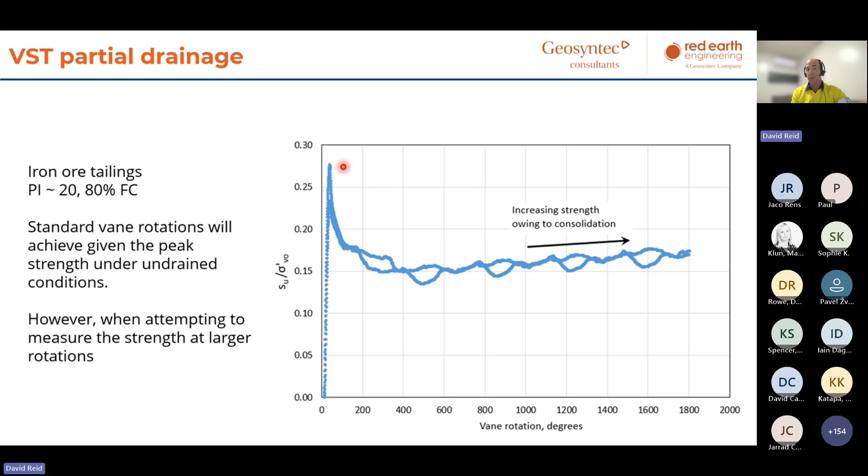However, many tailings, if you just go out there and push a probe at 20 millimeters a second, are going to be partially drained. It's almost probably the default scenario for a lot of tailings. While you're always going to want to do that first probe to get an IC value and do your semi-empirical stuff based on standard speed, if you're going to want to get cute later and do things like cavity expansion, you want to have either drained or undrained probes.

It takes away a huge area of uncertainty that partial drainage adds, because partial drainage is very hard to know where you are on the spectrum of partial drainage. It just makes everything more complicated.

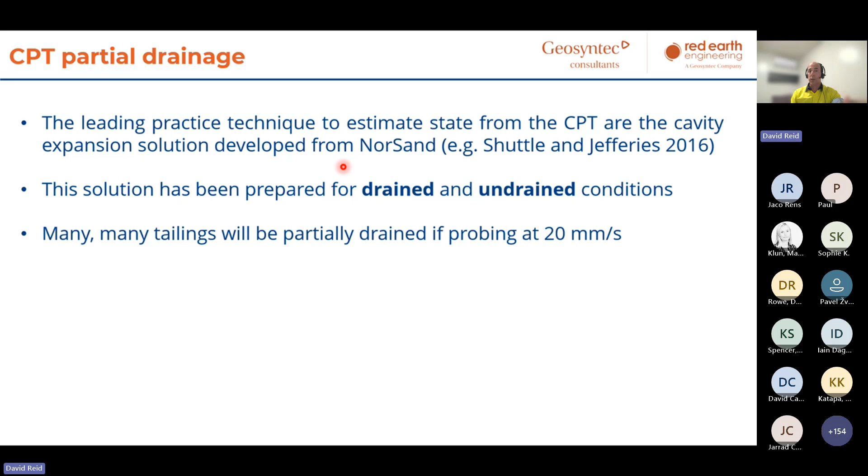Now, almost every good CPT contractor these days, if you say to them I want to push at 100 millimeters a second or 1 millimeter a second, they will happily do that. They've all invested a lot in the last decade and more to have these capabilities. So don't go out there and do a whole investigation getting all your results at 20 millimeters a second if it's all partially drained. Of course, do your first tests that way, get a feel for things, but then maybe decide to do some fast, some slow, depending on the situation and what you're trying to achieve.

This is an example from a paper that a former colleague of mine, Kyle Smith, and I put together. We wanted to look at what effect it would have if we had a partially drained CPT and we did the undrained cavity expansion - assuming things were undrained, even though they weren't - and the drained cavity expansion - assuming things were drained, even though they weren't - and then compared that to in situ tube water content derived state parameter. We get about this value here.

So the two triangles are probably what's closest to being right as far as anything is. Green is what you're going to get from that result if you assume it's undrained, and blue is what you're going to get if you assume it's drained.

Now, the Plewes method, which I know has plenty of criticisms that can be leveled against it, you can put in a site-specific value and it at least plausibly works in partially drained conditions for whatever else it's worth. So it's actually not agreeing or disagreeing too badly with the in situ tubes.

So it's probably got a state parameter of about 0.1. If you'd assumed undrained, which probably would have been the base case assumption here, you'd have got 0.05. And if you'd assumed it was drained, which would have been quite a stretch perhaps, you'd have got 0.4, which you probably would have thrown out because you would have said it's too loose, that's not possible. So just be very cautious when using partially drained CPT result data for this kind of thing.

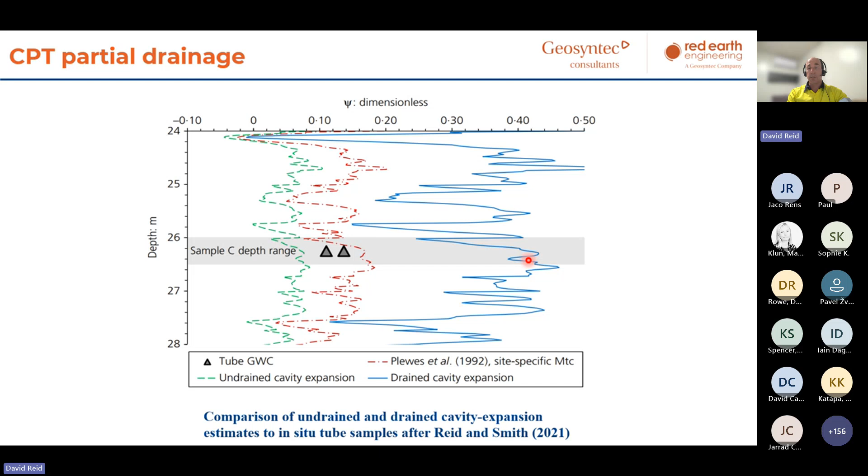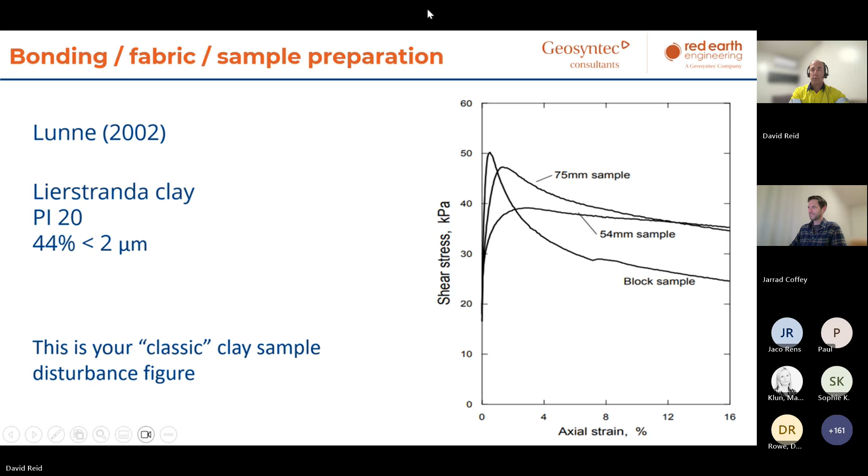Okay. I think I'll call it there. Okay, thank you, Dave. I'd love to selfishly let you speak all night because I'd be happy to listen, but I know you have a job to go to in the morning.

No further questions at this stage. I'll just check the Q&A column. No, oh sorry everybody, I was hoping for more, anyway that's not a good sign. I thought you were going to get more too. Well, we'll let you off the hook easily for tonight. I'm sure lots of you are in contact with Dave, and he's a common attendee at conferences and different events about the place, so anything comes to mind, I'm sure you'll be able to find him soon enough. Thanks, Dave, for your presentation once again.